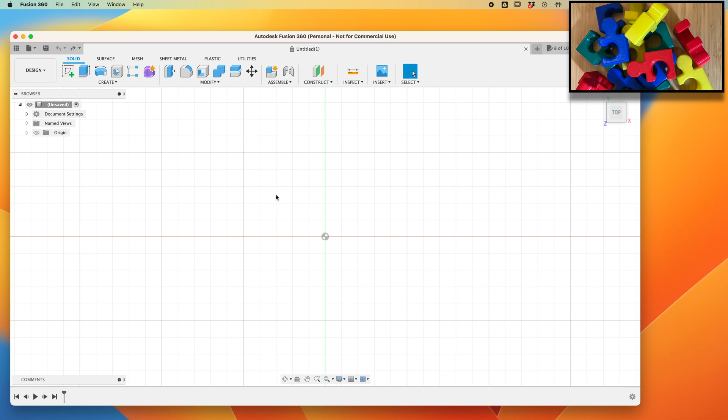Okay, we're gonna make a... it's a four-piece puzzle that looks extremely easy to solve when you first look at it. Then you pick it up and you try to put it together, and it just doesn't go together. So there's a special trick in getting it together. So it's deceptively difficult for such a simple little four-piece jigsaw puzzle.

So let's show you how to make one of those. I'm really surprised. I haven't seen this on Thingiverse or any other places when I Googled for it or anything. So, you know, maybe I just didn't look hard enough. But it's very easy to make, so I figured I'd make one.

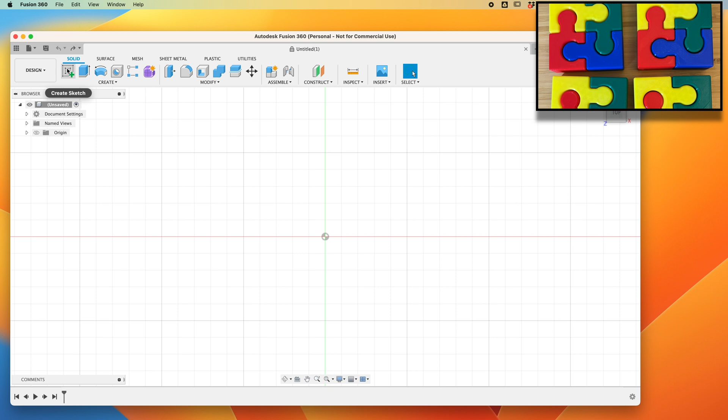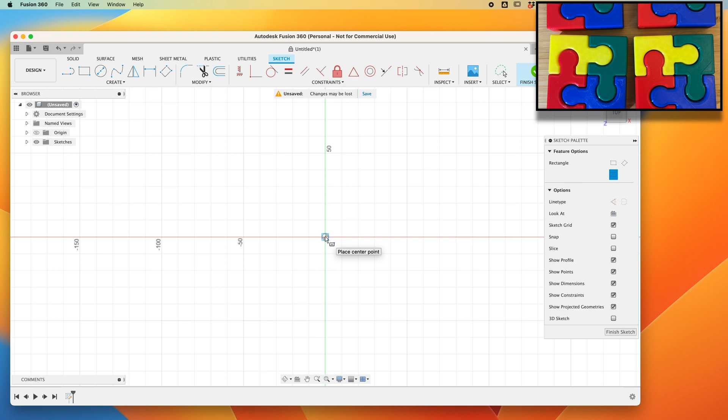All right. So first of all, like any design, you start with a sketch. Pick your plane. We just pick the horizontal plane. Okay. And what we're going to do, I found a good size. You can make it various sizes. I like 80 by 80 for the entire puzzle. So let's center it around the origin. It makes things easier later on.

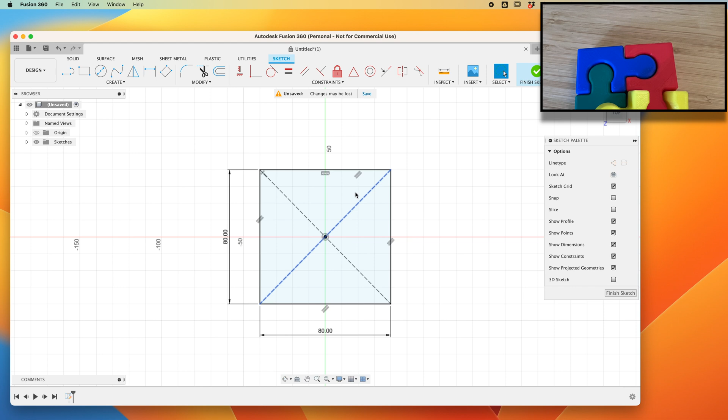So anyway, 80 by 80. All right, 80. Tab over the other one. Set that dimension to 80. All right, good. So the four pieces basically are going to be in these four quadrants. A piece here, a piece there, there, and there. Okay, I'll show you how to do that. So let's split this into the four quadrants that make up the four pieces of the puzzle. One there, and halfway through there. All right, so now we have four squares which are 40 by 40.

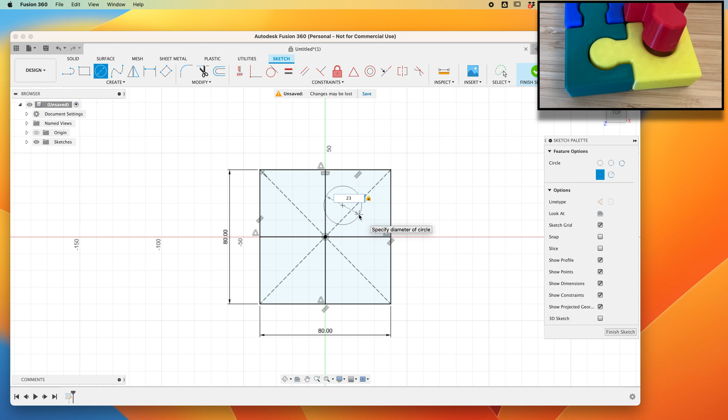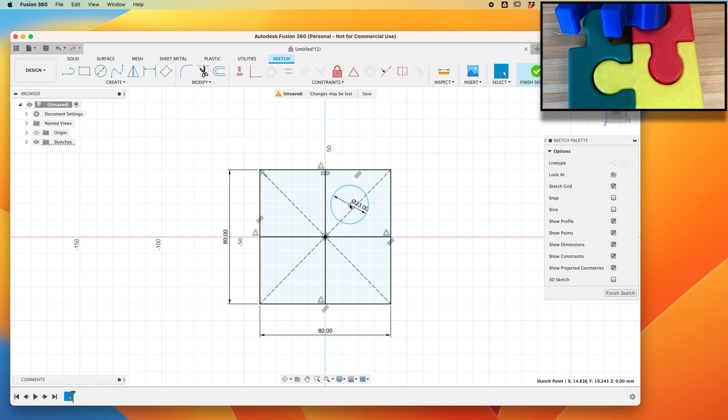All right, so now like all jigsaw puzzles, there's basically a circular shape. You can make this any shape you want. A circle's really easy to make and looks pretty good. Okay, so we're going to make this 23 millimeters. Kind of make note of the size, or well, you'll be able to see it in the video. And the key is this circle needs to be different on the top face and the bottom face. That's the key to making this a difficult to solve puzzle. So anyway, 23 millimeter circle.

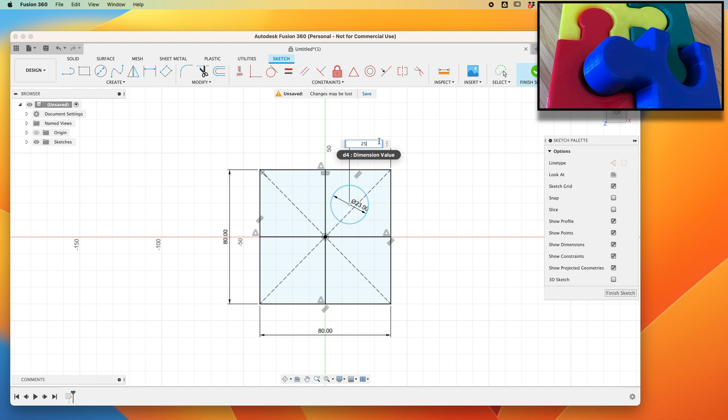I found off center actually makes it look a little bit better. So we're gonna make this be, oops, 25 is a good distance there, and then going from here to there, centered, which is 20. There's various ways you can center that right over, but anyway, that's pretty good.

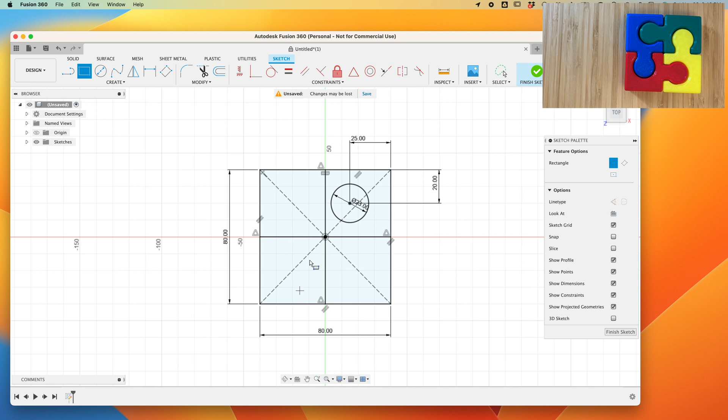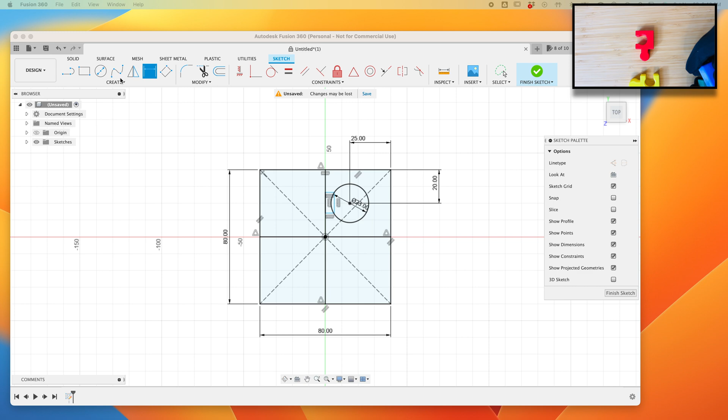Okay, and then we're gonna make a rectangle to connect the two pieces. Just do that. Okay, and then let's set the size of that. What I found, 15. Okay, 15 is good for that.

15. Okay, so an issue here is I want it to be in line with the circle here, so we need to make sure it's coincident. So just take the point, select the circle. All right, that brings it back to the circle. So those points. All right, so you kind of see how the puzzle piece is starting to take shape.

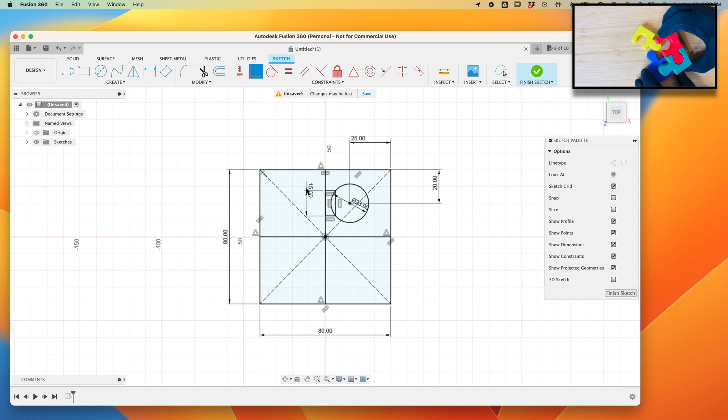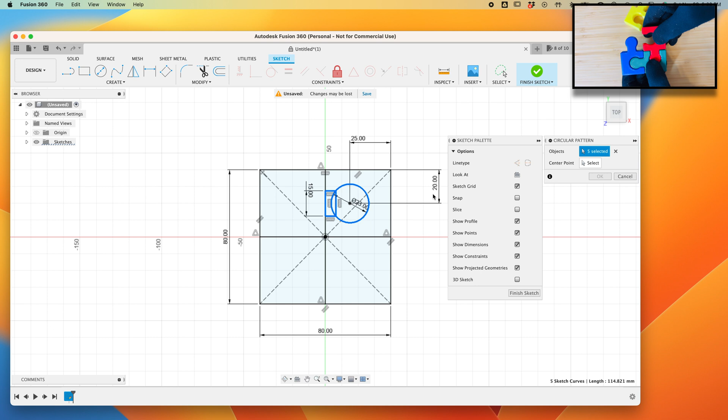Now we need to basically duplicate this pattern around all four pieces. So we create a circular pattern. Select our object, and our object is going to be the circle and the rectangle. And the center point is our origin. By default it's 3. Looks kind of funky. So 4 is what we want, right? Because we have 4 pieces.

And yeah, now it's starting to look kind of like puzzle pieces. And in fact, I think we're done with the sketch. Right, yeah, looks good. Finish sketch. Okay. Now, normally, if you're going to create a very simple puzzle for your 3-year-old, niece or nephew or somebody, you're making it for a child,

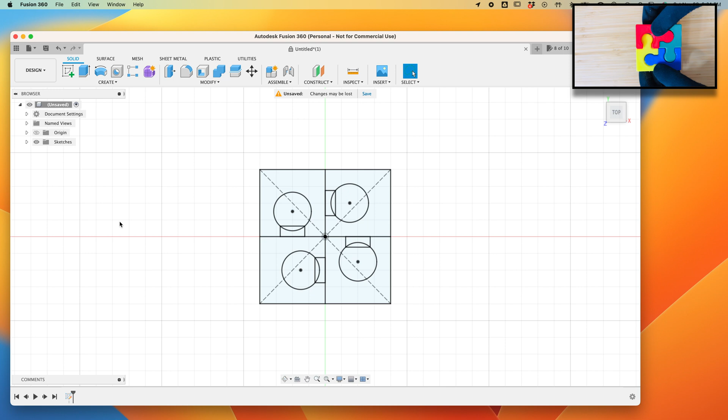normally what you do right now, and this is not what we're going to end up doing in the end, you just do an extrude. You select your pieces, right? That, this, that. All right, so that would be your piece.

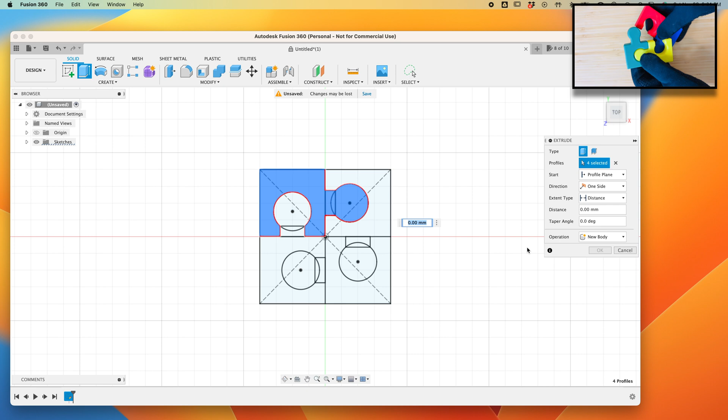20 millimeters. Okay, again, this is not what we're going to do. This is kind of, to somebody who's not familiar with the puzzle, what it's going to look like, and it just fits together real easy, like a child could put it together. But the trick is we're not going to do an extrude. That was just an example of what we might do for a simple puzzle. This is not a simple puzzle.

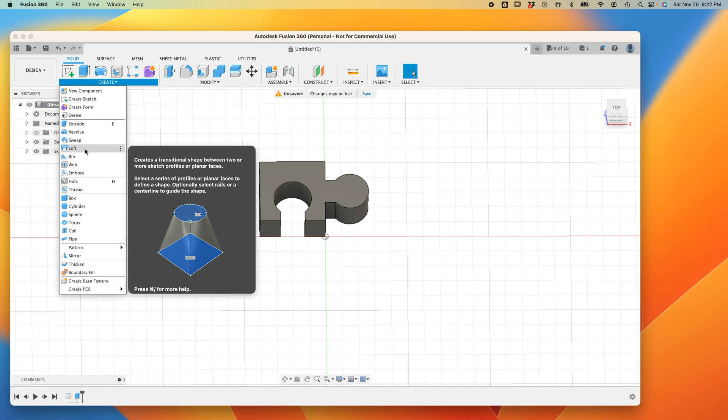So instead of an extrude, we're going to do a loft. Basically, we need two different sketches for a loft to do the same thing as we do with the extrude. So again, that was just an example of what we're not going to do. So what am I going to do? Just delete it.

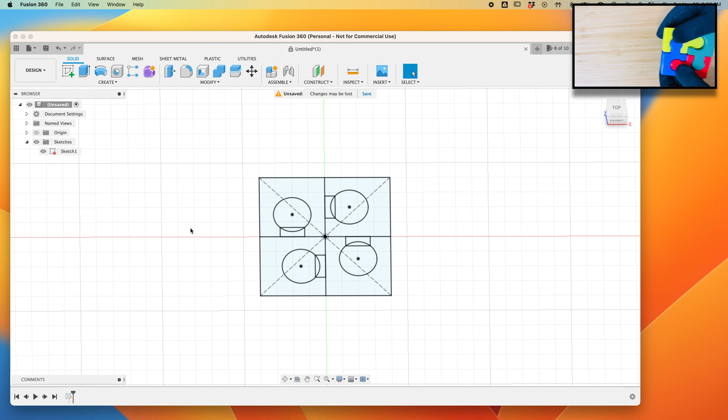Now let's show our sketch. There's the sketch we created. Now what we want to do is duplicate this sketch, and we'll make a minor modification after duplicating it. But we need to duplicate it. Remember our extrude was 20 millimeters? We're going to construct an offset plane.

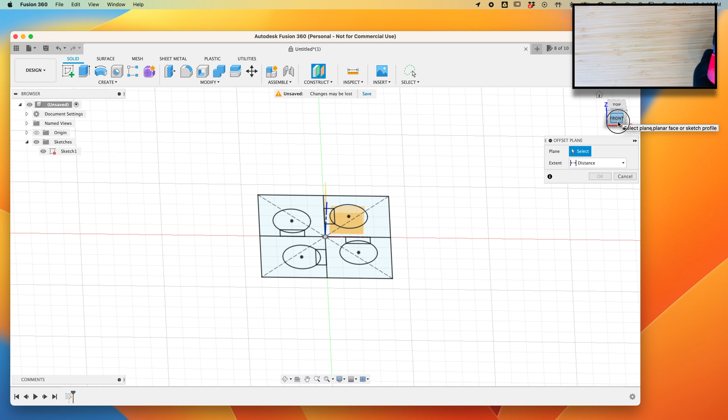The plane is just the horizontal plane. Did I get it? Select the horizontal plane, or it doesn't matter, that face. Okay, I just sort of selected that sketch, I guess. And then the distance is going to be 20 millimeters. All right, so this is our plane.

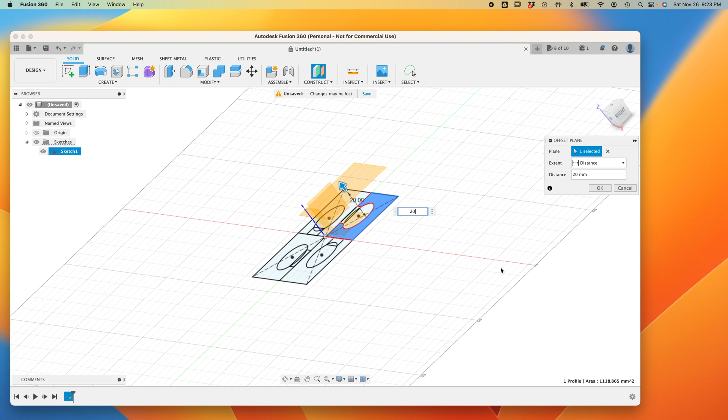Actually, let me hide the sketch, it's easier to select. I just select the plane. It doesn't matter either way. Anyway, I selected a 20 millimeter offset plane, just like that, from the plane of our original sketch.

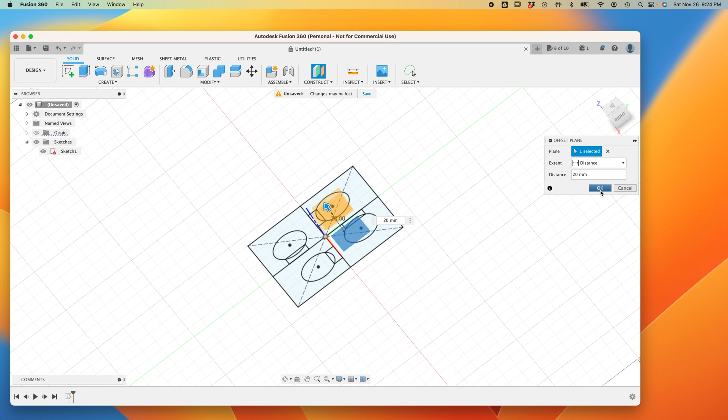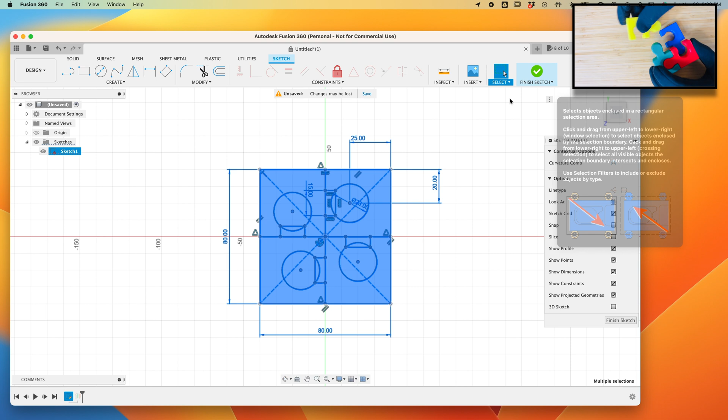So now what we need to do is duplicate that sketch onto that new plane, and then we'll make some minor modifications to it. What I usually do is edit my sketch. You need to select everything. And notice, if you get some weird selections, I have it so you get this rectangle. Sometimes freeform is selected, so you want to make sure you have window selection, and then it's easier for me to just select everything.

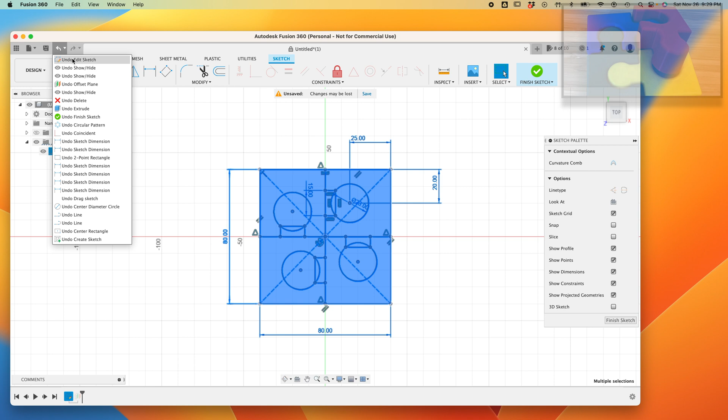Then Command C on my Mac to copy. So you're copying everything in this original sketch. And then I'm just going to undo the edit sketch because we didn't make any changes, we're just copying it. So now I want to create a new sketch, and this time we're going to put it onto this new plane that we created. Select that plane there, and we're editing the sketch.

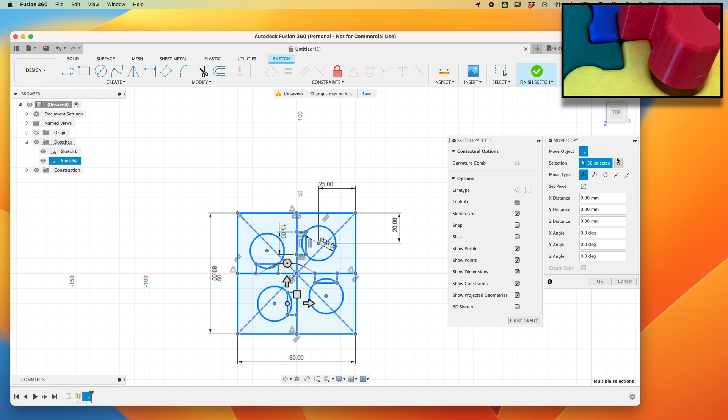Command V to paste. So we just pasted the old sketch and generated a new one. All right, looking good. Oops. All right, click OK because we're good with that. Now, minor modification. Let me get this right here.

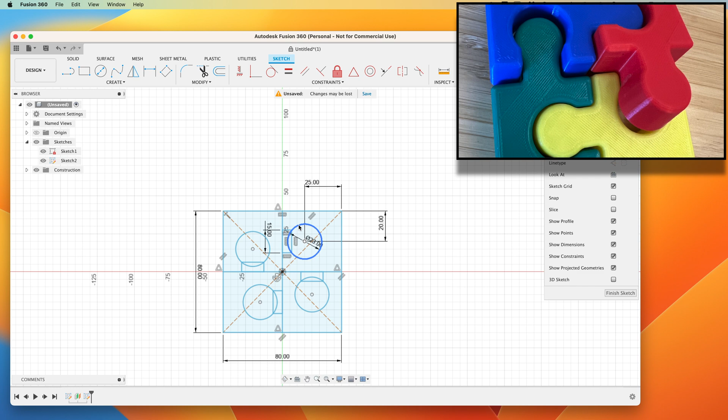So the key to the puzzle is that this circle needs to be smaller at one end. It's slightly a cone, not just a straight cylinder. A simple puzzle is just a cylinder; you slide it right in and it goes in. So the key here is this 23 millimeter circle that we created in the first sketch. One minor modification, we're just going to make that 20.

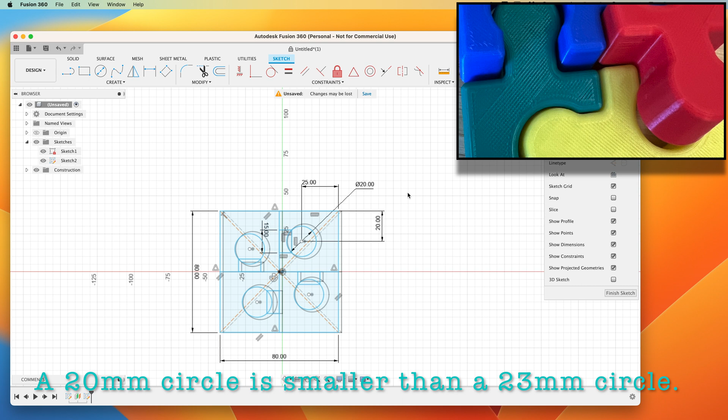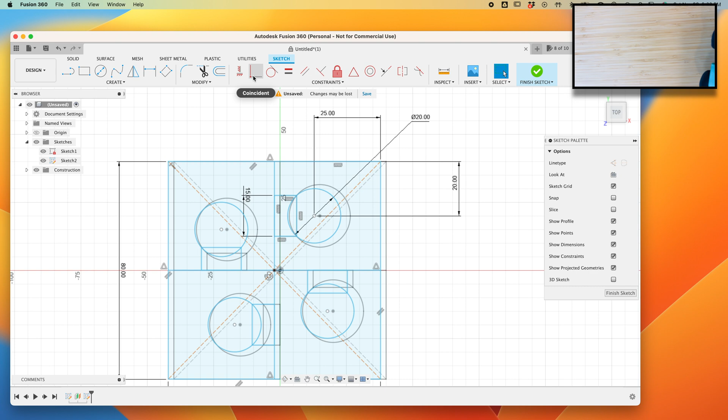So one end is going to be 20 millimeters. The top is going to be 20 millimeters, and the bottom is going to be 23. And when we changed that, it shifted everything. So we need to make sure these are coincident. We pick that and make sure they're coincident, so they're directly on top of each other.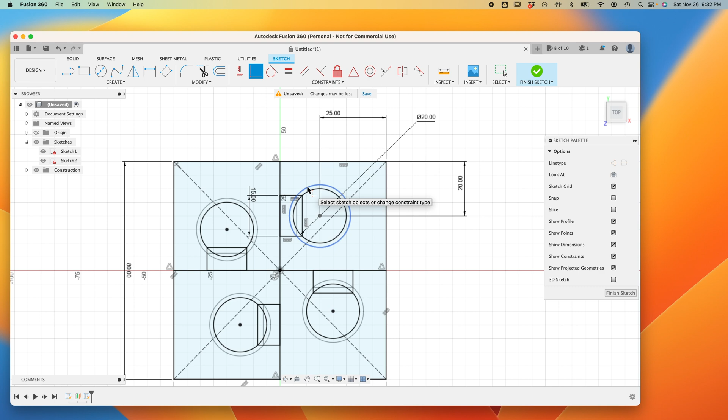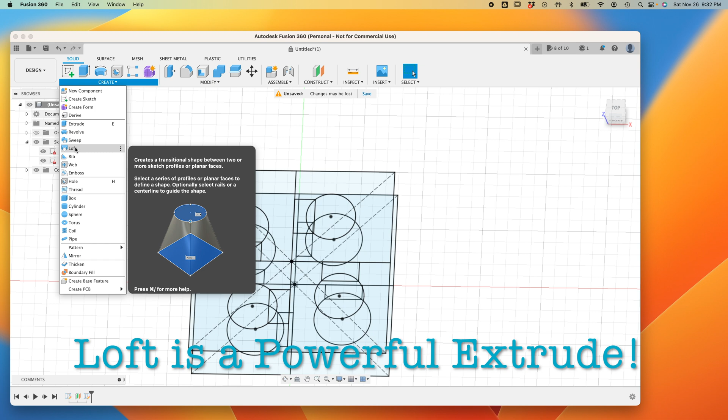Okay, so now the trick is, instead of an extrude, we are going to do a loft. What a loft does is basically you need to specify two sketches. I'm going to hide sketch 2 for the first profile. It does an extrude between two sketches and kind of connects all the dots. All right, so I'm going to connect, do that, select that. So that's one profile.

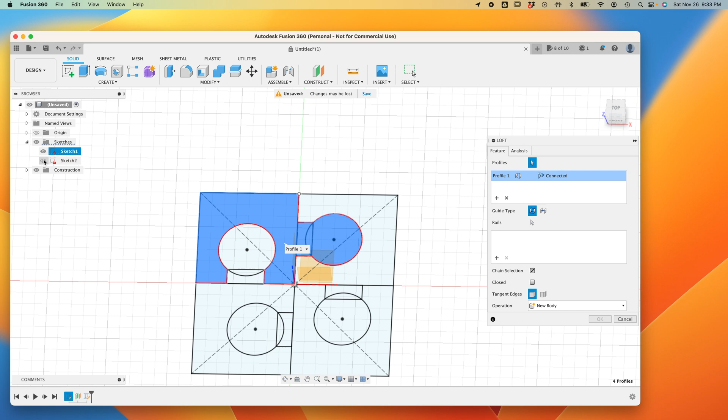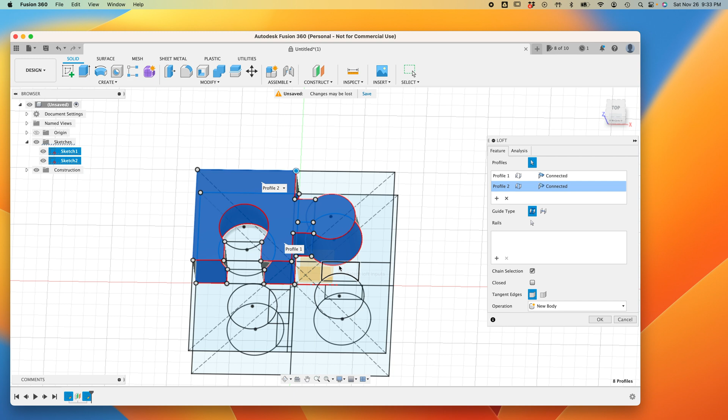And then another profile, same things, but on the other sketch. There and there. Okay, pretty straightforward. It's almost like an extrude, except it figured out how to connect this wide circle to this narrow circle, and then this is also slightly different there too. All right, so that's all there is to that. There's our puzzle piece.

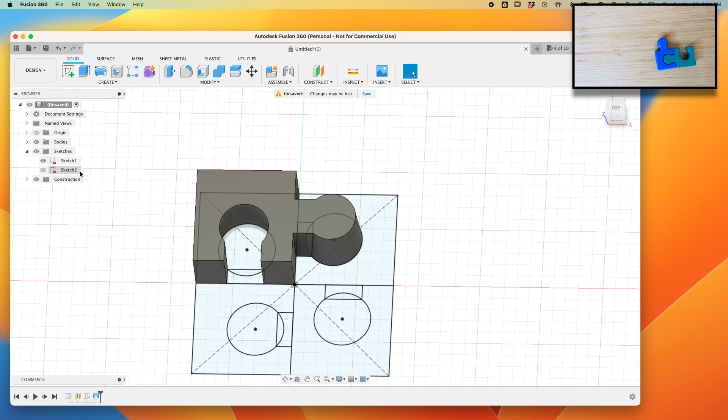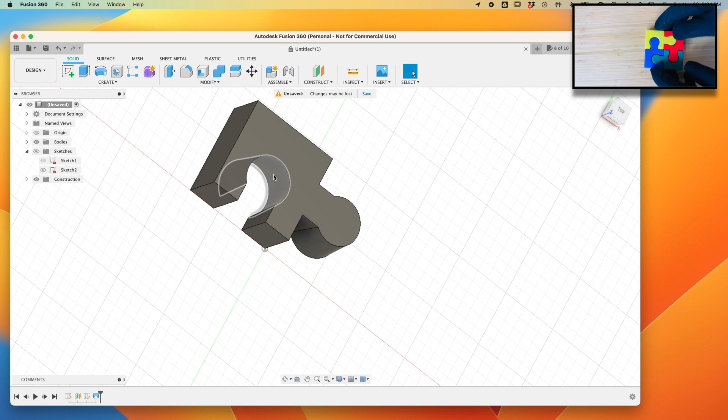It's straightforward, except this. Here, let me hide my sketches. Good. That is narrower than that. This is wider. This is narrower than that. It's not a perfect cylinder. So basically what that means is you have to put the piece down, one piece into the other one from the top in order to put it together. So it's something. Okay, so now another thing, we need some play in this.

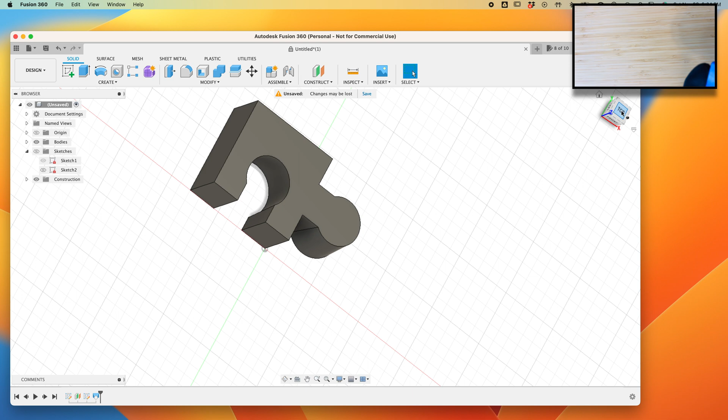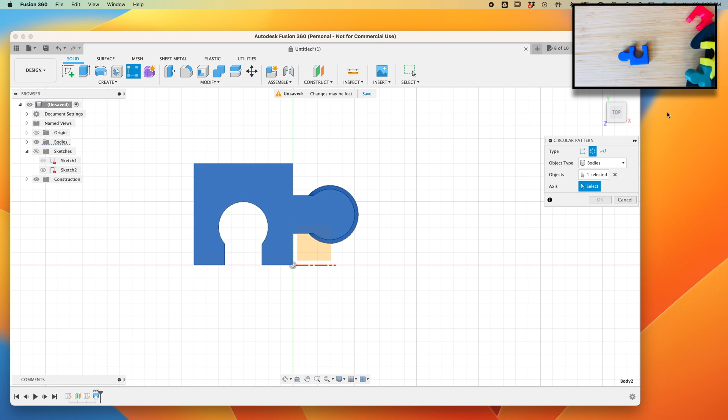So here I'm gonna duplicate this around a circular pattern. Usually I just click this, and we don't want a rectangular pattern, we want a circular pattern, right? So we select our body. We're going to select our axis, and that's the z-axis here. Just pick that. Change it to 4 for puzzle pieces. Just like that. Okay, looking good.

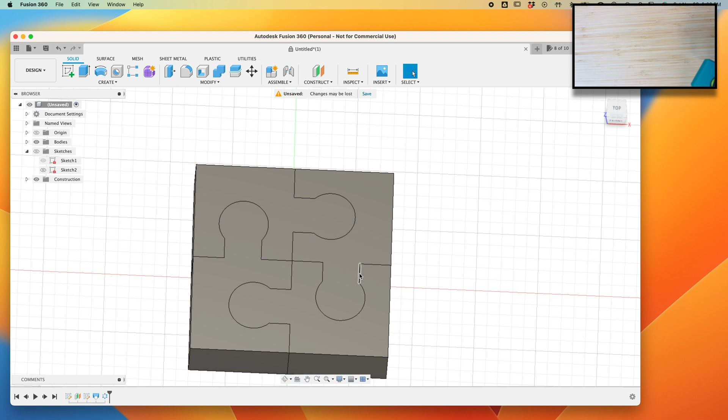Now the issue here is that we need some space in between. Really, we need some space here and here and here, because you won't be able to solve it if this is directly in line. So that's what I'm going to do. I've already created my circular pattern, but we did that prematurely. So all I'm going to do is roll my history back, and we can still use that. So here's our piece before we created the other pieces from it.

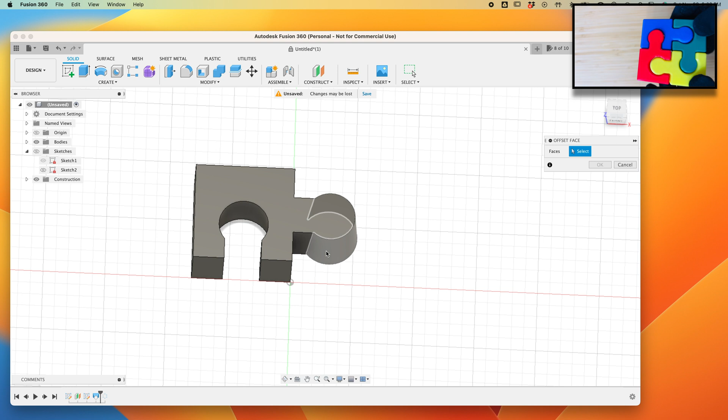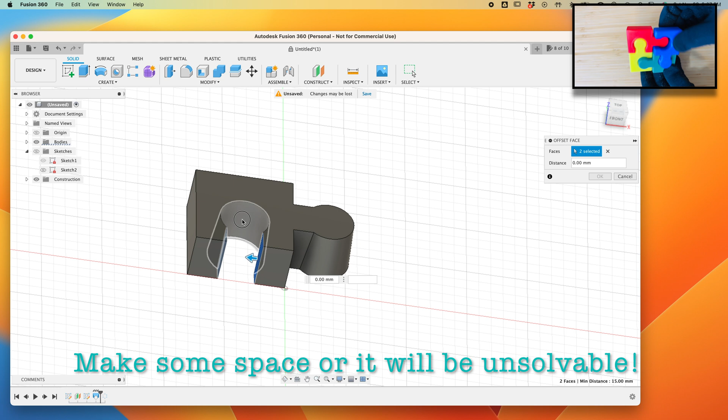So the key is I need to modify this and do an offset face. I need to make this intersection a little bit bigger than this point here to create a space, as well as these side pieces. So let's do that. So that and this, and that. Okay, those pieces.

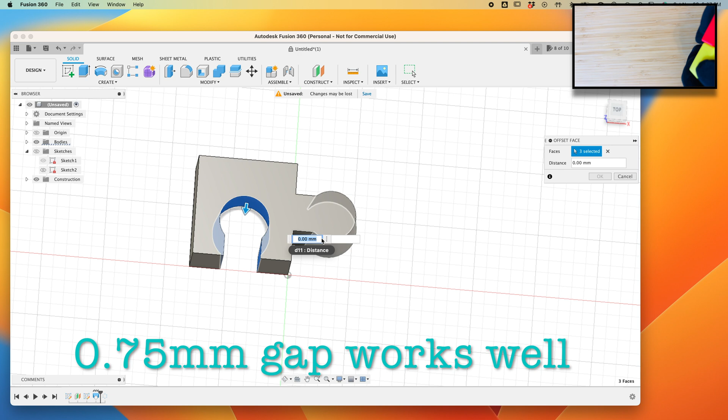So I need this to be a little bit bigger. What I discovered is 1 millimeter is awesome, easy to solve, but the solved puzzle is a little bit loose. Half a millimeter is doable, but you kind of have to force it in. So a good medium, I discovered that about 3/4 of a millimeter, 0.75, is pretty good.

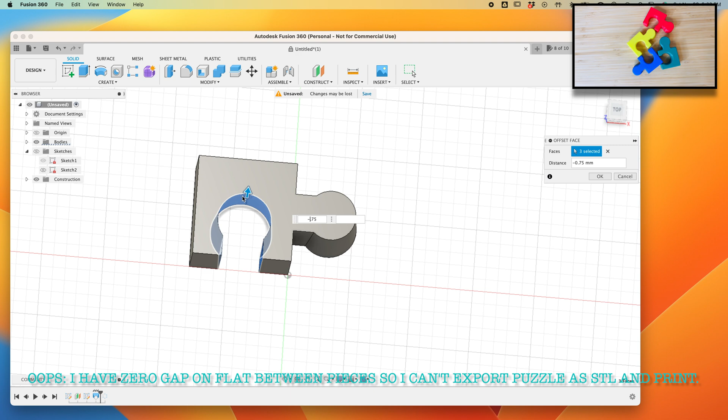So I did 0.75, and that actually made it smaller. We need it to be bigger, so it's actually negative 0.75. All right, so it got a little bit bigger. So now this section is smaller than this section here. That's good. So we created a little bit of gap. Now the other thing is, especially in here, we need to create a fillet. One, it makes it look nicer, but maybe even more importantly, you kind of need that for solving it.

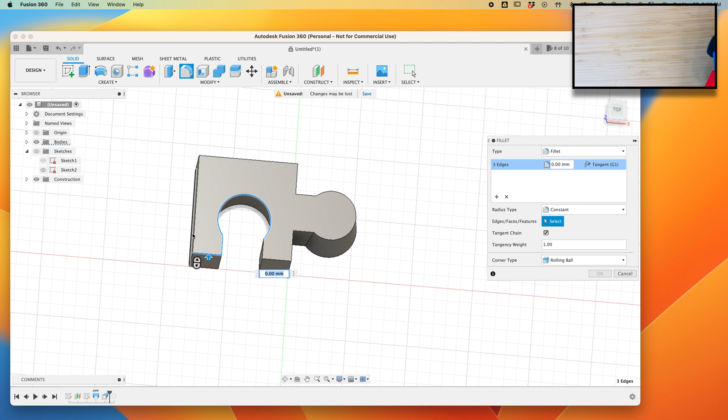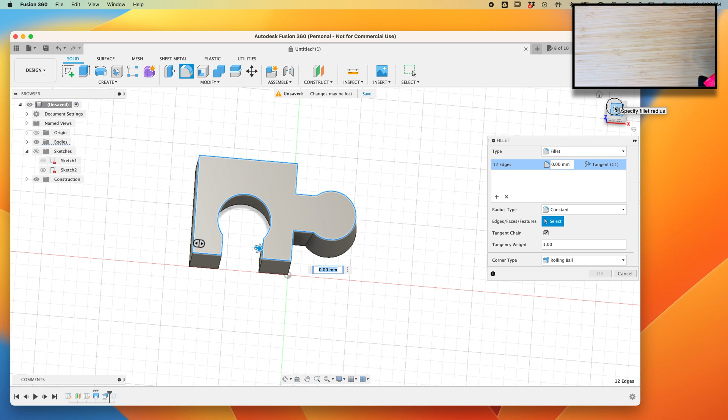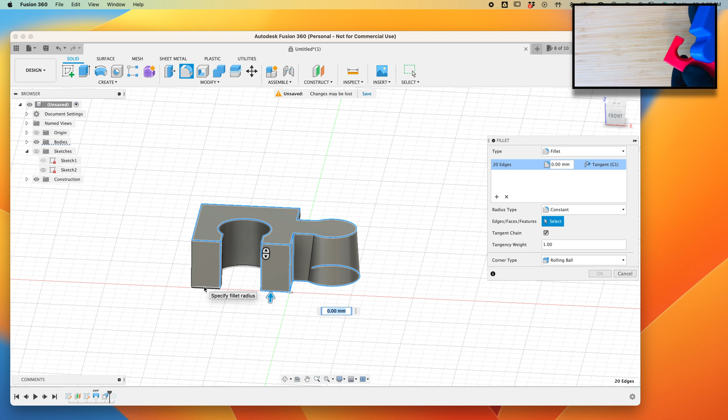Okay, so we're going to create a fillet all around the edges of 2 millimeters, just everywhere here. All around the edges, top. Do this one there. I think here I'm going to do a bigger fillet just to make it look better, so I'll skip that one. But we do this one here. And try to select all the edges. There we go. How are we doing? Looking pretty good. Okay, so 2 millimeters.

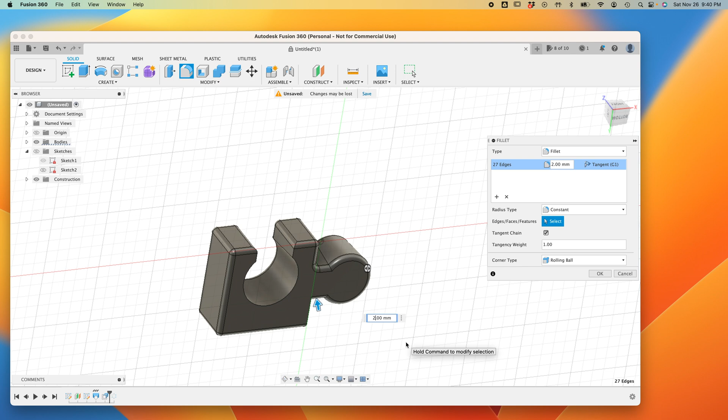2 millimeters. Oh, it looks like I missed some edges in here. So by the way, the trick if you've done this, what I do is just set this back to 0. I forgot that edge there and there. So I just remember that I wanted 2 millimeters and set it to 0. And then I got my things back so I can make those selections. This one there. Okay.

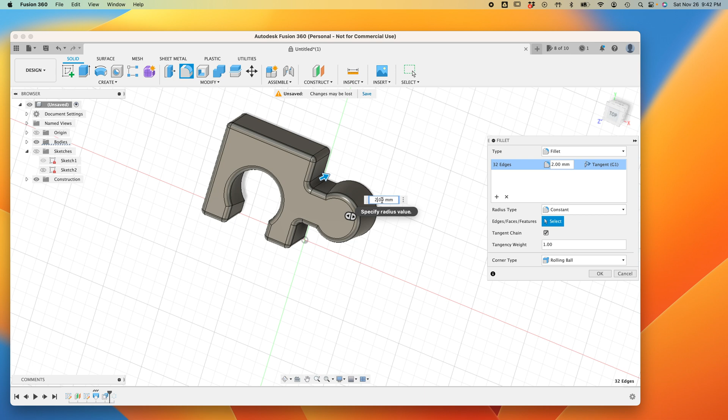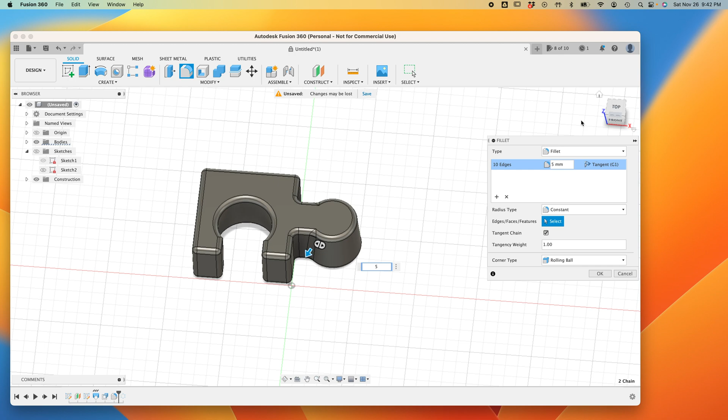Okay, and then pick that one, and then back to 2. Alright, looking pretty good. Alright, now let's do it again for, pick that one, and that one. This is going to be 5. It's a nice big one. Alright, pretty good.

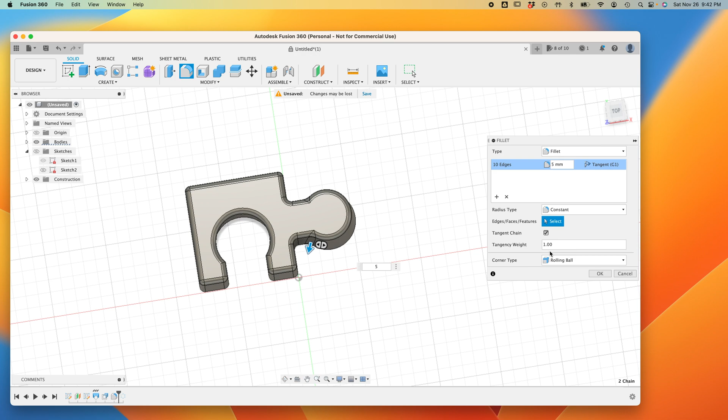This looks a little bit better with 5. It rounds it out a little bit. You know, potentially even this one you could do more and play with it. And again, these shapes don't really matter too much. It's easy to make a circle, but you could make an oval and stuff like that. But you get the idea. All right, looking pretty good. All right, so looks like we're essentially done.

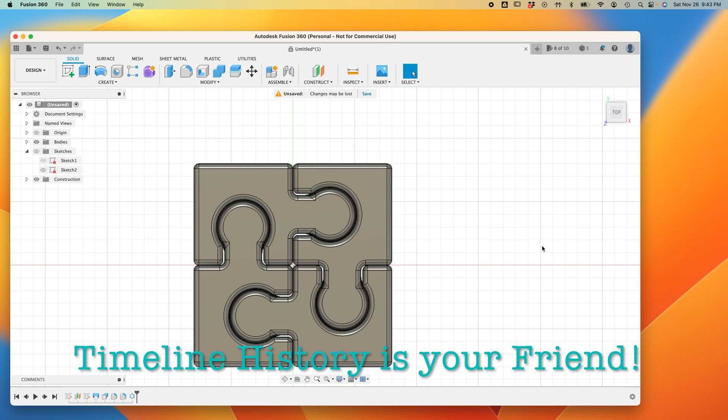Now, remember before I created that circular pattern? Well, I just roll my history back to where I was, and that's what it looks like. Very important to have these gaps there, and notice there's a gap there. If I rotate it, you can see through, but I had to rotate it in order to see that gap, right?

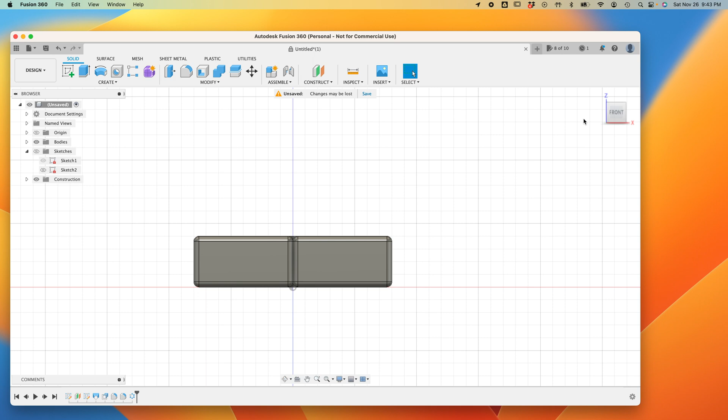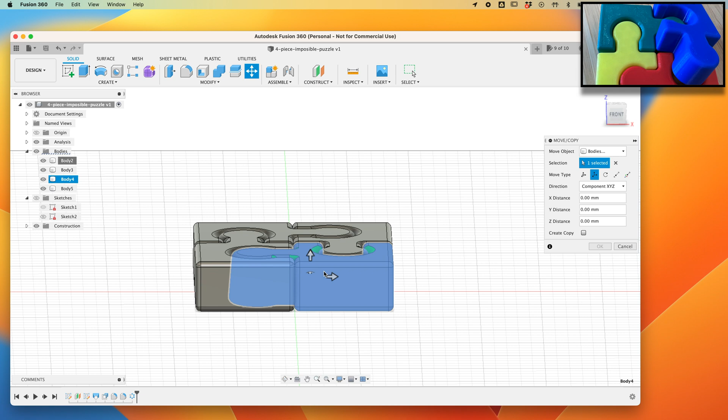So now, just for fun, I mean, we're done, but I just want to show you what's interesting about this puzzle. So I'm gonna move or copy. Okay, here we are. So here's the thing. This is smaller than that, which means that this right in here doesn't fit. You can't go down into that because this is too big for that hole right there.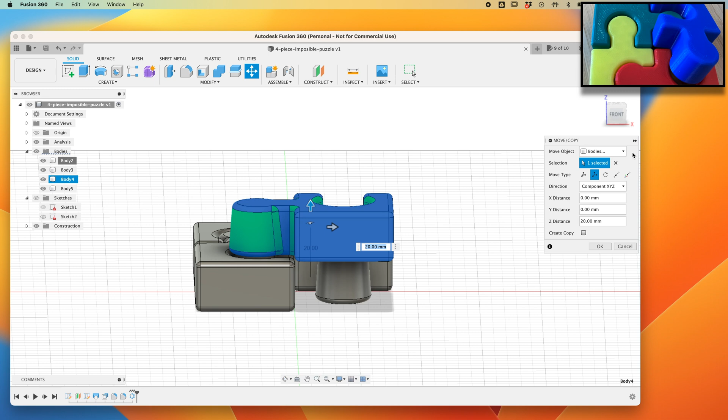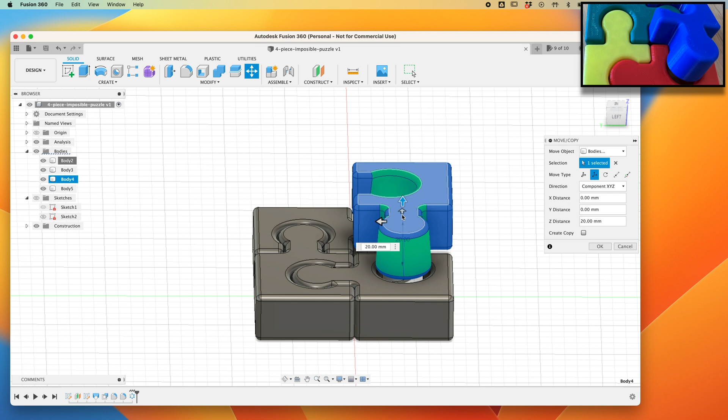Let me go around here. Right, it's just a little bit too big to fit into that hole. Okay, so the only way to solve putting this into here, you can't go down into it. You have to come up from the bottom. Okay, so it fits nicely that way, right? See in there? Fits nicely. Now, here's the problem.

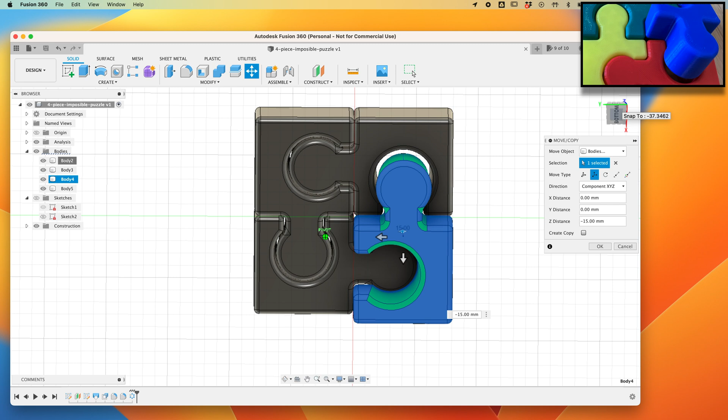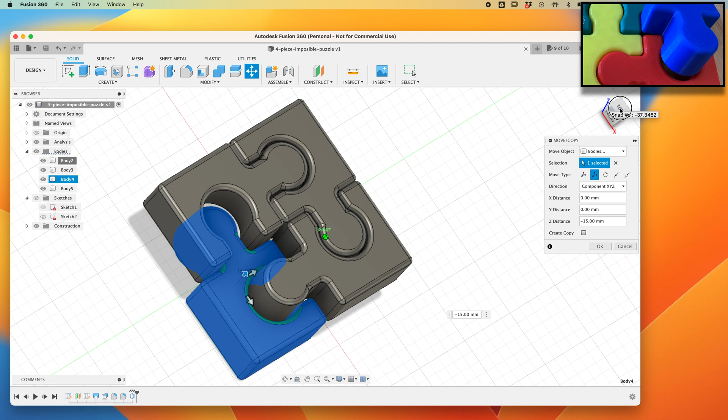This one, you can't come from the bottom to go into that one. Let's bring it around here. So this fits nicely in here, but this won't fit. So how are you going to get it together? This one, you have to go from the top down to get this in around that. You have to come from the top down, right? From here to get this one, you have to go from the bottom up.

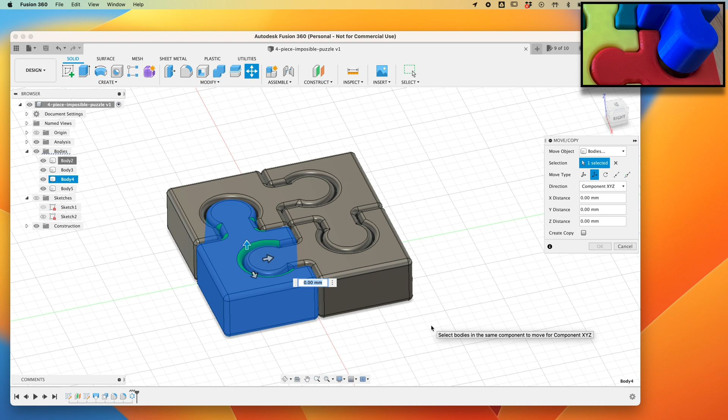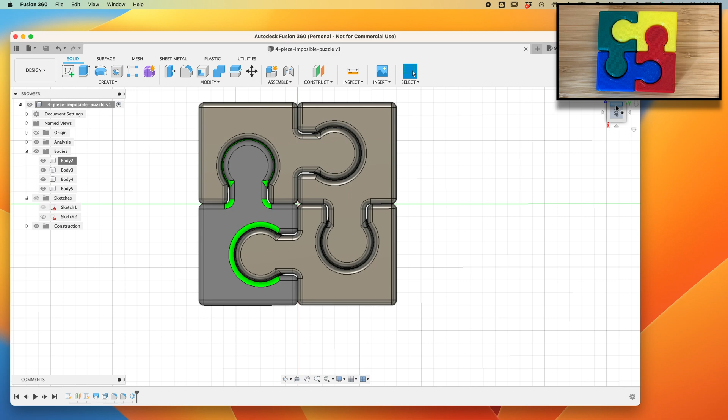So it's like, what do you do? That's the trick. So there's a trick to it. It can definitely be solved, but that's for your imagination. Anyway, I just want to show you that. I didn't want to make any changes there, so I'm just going to hit cancel. So get this around the normal orientation, and there, ponder that.

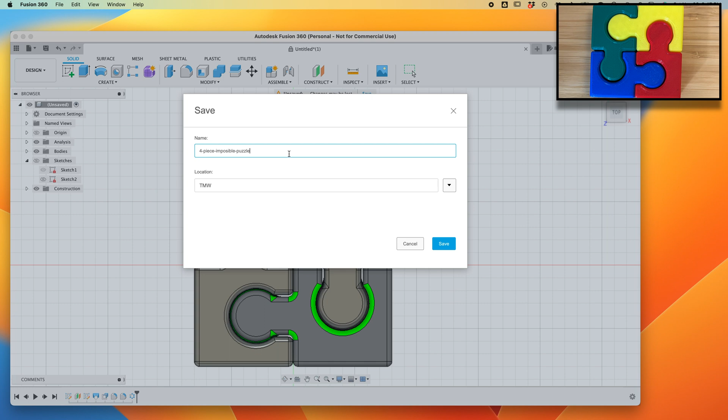Save it as something. Okay, 4-piece-impossible-puzzle. Yeah, save it into, right. So I saved it, but it's probably better to print these separately so they're not together when you print them.

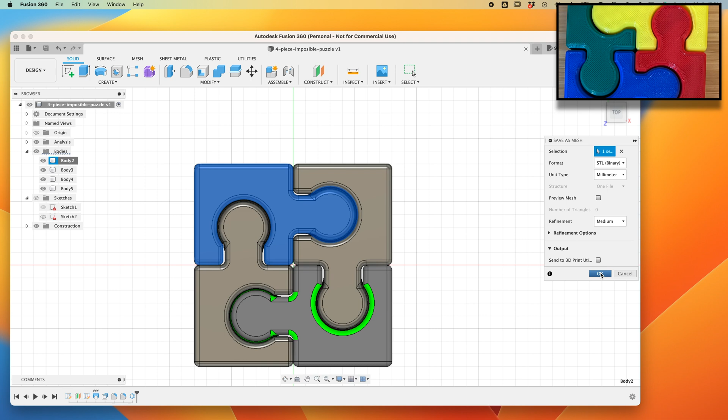So what I do is save any one of them, body 2, 3, 4, 5. They're all identical. So I just save as mesh, so I get my STL file for my 3D printer, right? Save as mesh, and then I save it as whatever you want to name it, impossible piece.

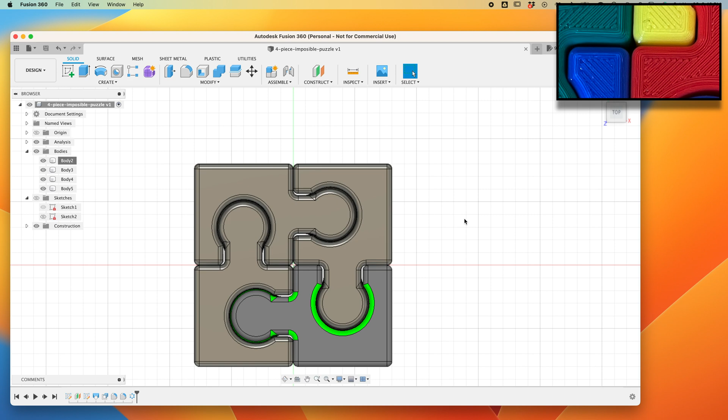So that gives you two options. One, you can print them all four, and on my Ender 3 for this size of thing it took me a little over 6 hours to print all four pieces. But you also have an option of printing in four different colors if you do one piece at a time. All the pieces are identical, so just copy the mesh 4 times for your printer to print. And that's about it.